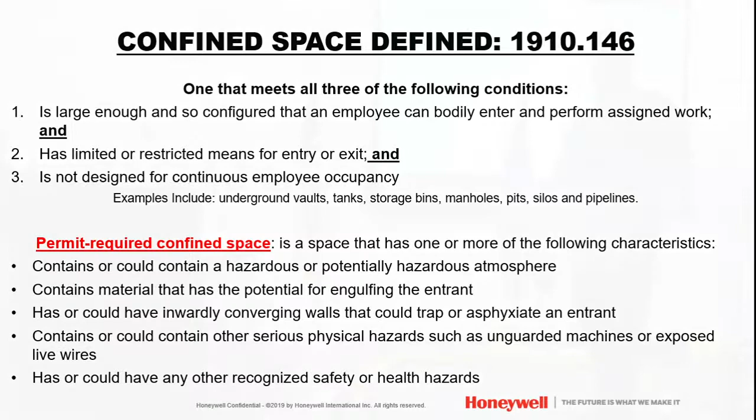Here's the last one that gets absolutely everybody, and you can't really defend this - has or could have any other recognized safety hazard. So what if it's dark? That's a safety hazard you can't see. What if there's mice or rats? Because you guys are underground - what if there's rats? That's a safety hazard to me because I don't want to be around rats.

So that's where you get on a permit required, and where people try to say stuff is a confined space and not a permit required confined space. That last sentence is where you struggle trying to defend yourself when you try to just say it's a confined space and not a permit required confined space.

So, confined space workers - now we're specifically talking about the workers. This is a great example for you guys out on your city streets, potentially, or at a pump station or something like that. You've got the entrant, you've got an attendant, you've got an entry supervisor, and an emergency rescuer.

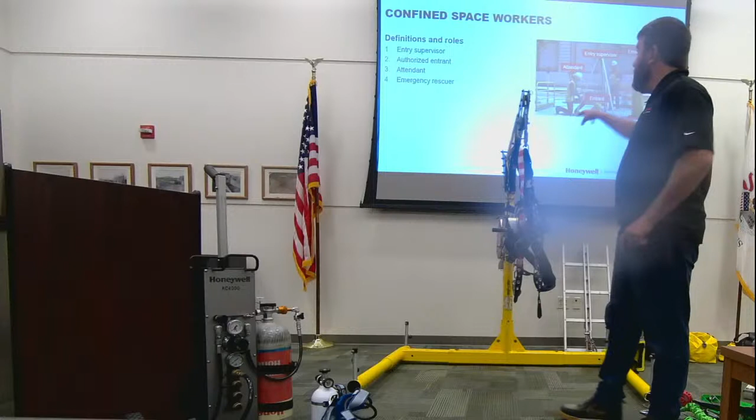You see how there's 3 people for one person going in? How many people want to admit here that normally a lot of times they only have one person for one person going in? So they only have a 1-to-1 ratio instead of a 3-to-1. I'm not going to call you out or embarrass you, but I know it happens because of course we're all busy - people don't show up for work, you've only got 2 people available. Yeah, I understand it happens. But if you want to do it right, you got to have those 3 people.

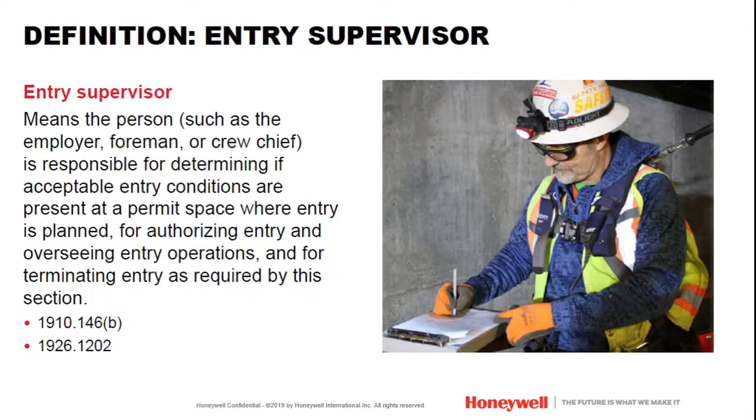So what's the entry supervisor do? Means a person, such as an employer, crewman, foreman, or crew chief, responsible for determining if acceptable entry conditions are present at a permit space where entry is planned. So essentially they oversee everything - that's what the entry supervisor does.

Authorized entrant essentially means a person, like the picture shows, climbing in. They're the person that's going to go in and do the work.

Then you've got an attendant. It's the individual - like Rich was talking about - making sure they don't have their phone, they're not distracted, that they're communicating with the person in the confined space, giving those direct readouts. You can see what he's doing there with his gas monitor.

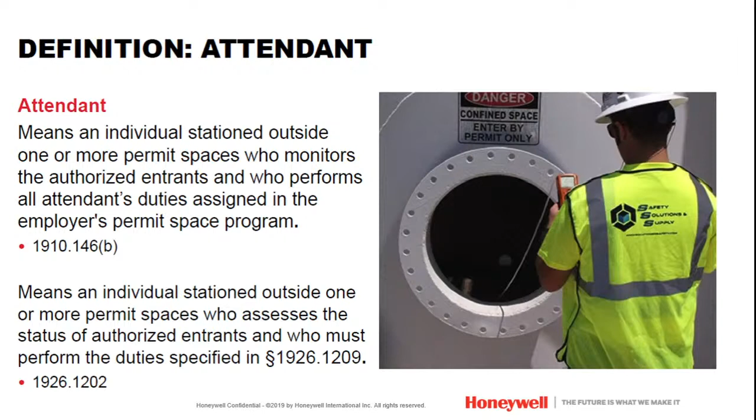And of course there's the emergency rescuer. That person is the one that goes in if the entrant becomes asphyxiated, has a problem, breaks a leg, or has a heart attack, that's the person going in to rescue that individual. So, 3 basic atmospheric gas hazards.

Of course, oxygen - are you deficient or are you enriched? Because both can cause issues. Being deficient would be lower than 19.5%. If I showed a gas monitor right now in this room, I know it has 20.9% oxygen because we're all standing and upright. If it goes below 19.5%, all of us would struggle - we'd have problems breathing. We'd all be affected a little differently, but that 1.4% is all we're talking about before our body starts having issues.

Of course, enriched oxygen can cause issues too, from flammability standpoints, explosions, etc. Human senses cannot detect oxygen deficiency or enrichment. So we don't know - I'm breathing this here, it might feel like it doesn't have enough oxygen, but we don't know that. Your body will eventually start trying to get more air because it's not getting enough, that's when you know, but you can't actually sense it directly.

Of course you've got your flammable gases and vapors. H2S can explode. There's an explosive limit for a lot of different contaminants, and all of them are at different levels. And then, of course, there's toxic contaminants. So essentially, hazardous atmospheres are any atmosphere that can become oxygen deficient or oxygen enriched. That's essentially what we're looking at there.

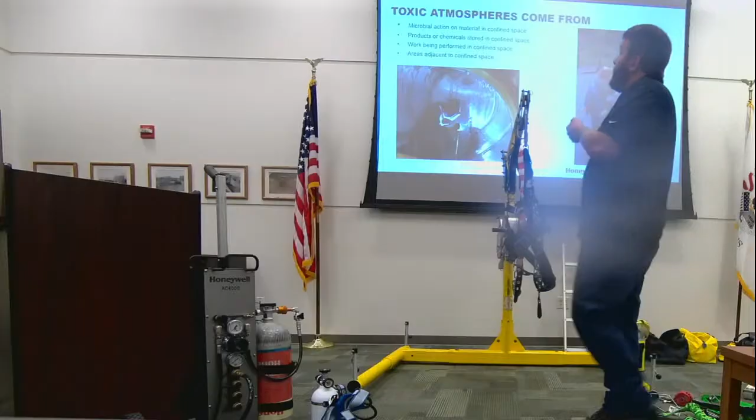Toxic atmospheres can come from the environment - maybe it's microbial, things breaking down and bacteria releasing those gases. That's an application you guys could potentially have - products or chemicals stored in a confined space.

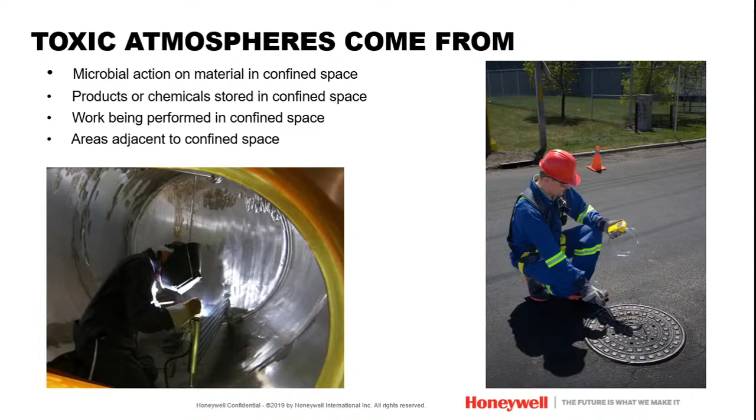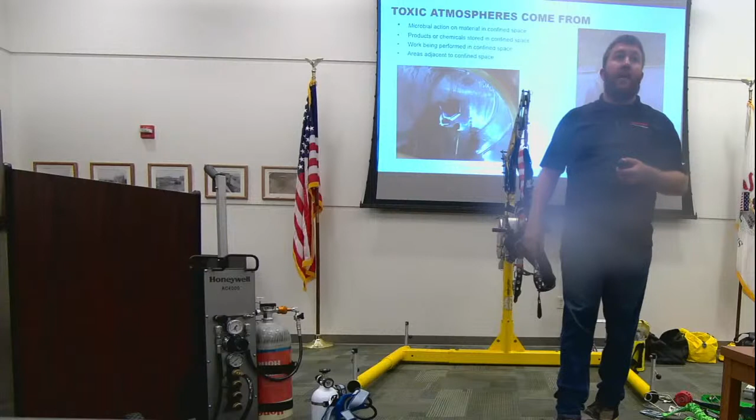So you can see this guy welding in the pipe. I assume you guys, especially here in Peoria, are talking about a 60-inch pipe - you probably have a lot of pipes like that. There's a specific example, I think it was out in Utah. Guys were in this pipe, there were like 6 of them. It was much bigger than what's there.

I mean, it was like 1,500 feet. They were cleaning their paint guns, spraying something, and they had a ton of MEK - methyl ethyl ketone, very, very flammable. They had a fire because they had all this stuff stored in there. I don't remember the exact details, but that's what I'm talking about - they brought the hazard into that confined space and had it all sitting right there.

They literally had to go another 1,000 feet down the pipe trying to get away from the smoke. It was so black the firefighters couldn't even get to them. So that's the kind of thing you have to think about when you're working in pipes and underground, etc. Make sure you understand what potential hazards there are.

Work being performed in the confined space, of course the welding creates potential gases, and then there's areas adjacent to that confined space. We had Tom, our gas detection specialist, give an example of a construction crew in a pipe like this underground - their monitors kept going off and they couldn't figure out why.

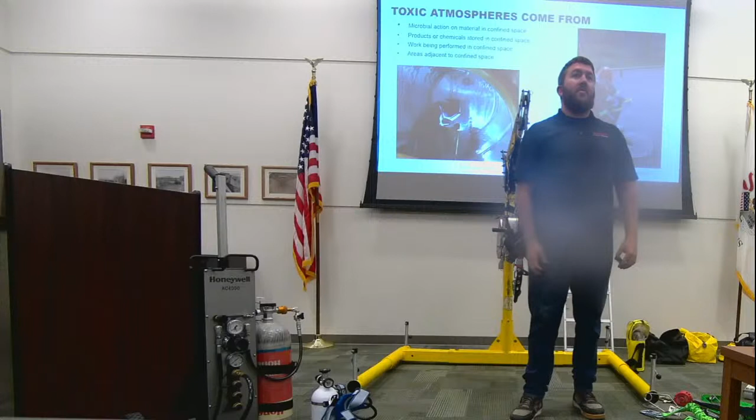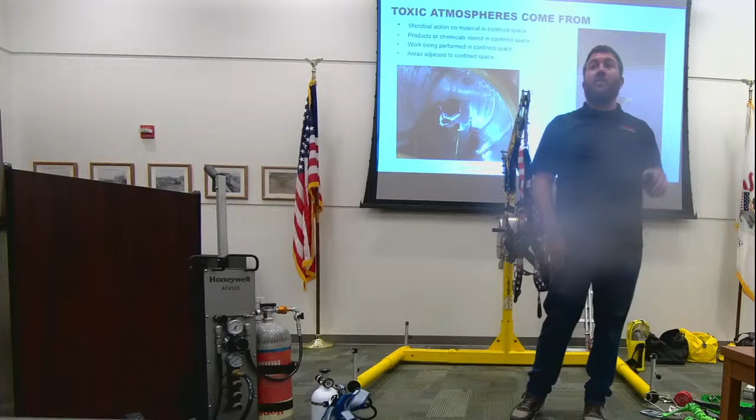But a half a mile down the road there was a big construction project, and it was all the exhaust from all their equipment right by their intake. They were literally getting all that gas because it was running all day long, and that's what was setting off their monitor. They thought something was wrong with the monitors, but he said no, the monitors work - the monitor's telling you that you need to get out of there. So it's not necessarily your own work; it could be somebody next to you creating that gas that comes into your area.

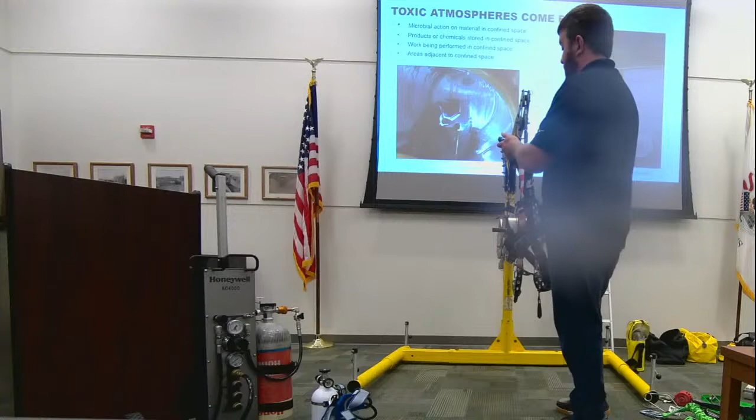So what is defined as entry? Essentially any action resulting in any part of the body breaking that plane. That guy right there got balls of steel because he's going down a manhole with nothing - that's like New York City or wherever it is. If you break the plane of that confined space, that's technically considered entry.

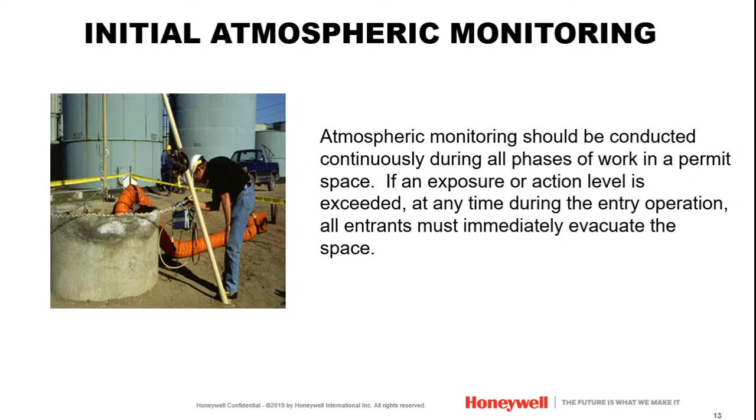So initial monitoring - you can see what he's doing there. Atmospheric monitoring should be conducted continuously during all phases of that permit required space. You've got to do it all the time. If any exposure or action level is exceeded at any time during the entry, everybody must evacuate. Jason was talking about a situation where the monitor went off and everybody got out - great, that's exactly what you're supposed to do. Again, your personal monitors are ring and run devices. It rings, you run. You don't sit and question and try to figure out what's going on - you get the heck out.

So when we talk about atmospheric testing, the main thing is with gas monitors. I get the calls all day, every day - my monitor's not working. Well, when's the last time you calibrated it? You've got your gas monitor, it's like a computer - it works right out of the box, but eventually the sensors become desensitized depending on how you're using it and what you're using it for. O2 is always the first one to go out, but it needs to be calibrated to make sure every time you're using it that it works.

It also needs periodic testing - that's what bump testing is. If you have a docking station where you put your monitor in and close it, I'll show you one if you don't know what that is. There are manual processes to calibrate gas monitors, but I quite regularly get calls and emails from people who just don't know how. If you don't know, that's fine - we'll come and help you understand how to use your monitors and your cal gas. But you've got to be able to calibrate specific to Honeywell - if you have Honeywell BW Technologies monitors or RAE Systems, typically on every gas monitor it's going to be 180 days to calibrate, and you're bumping every day.

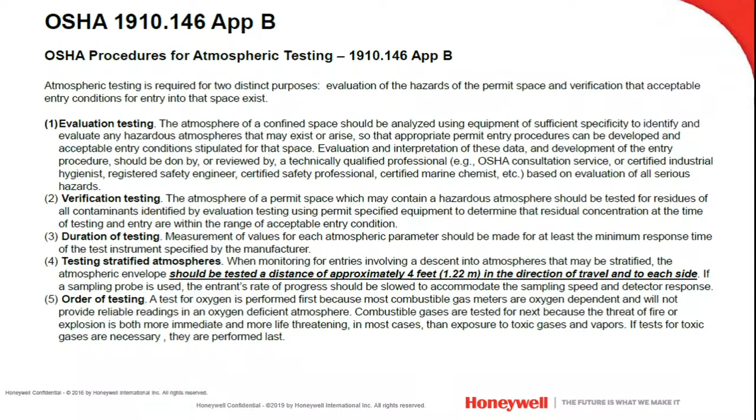Here's the specifics on how to do it, if you really want them - I'm not going to go through all this from a time perspective, but this is literally what you need to do for your atmospheric testing, your evaluation, your verification, your duration of testing. You see a lot of people put the hose down, go 30 feet down really fast and pull it back up. The problem is the more hose you have on that direct read monitor, the longer it takes that gas to get back to the monitor. So if you're going too fast, the monitor can't even respond because you're moving it too fast. There are very, very specific instructions on how to do your periodic testing and your pre-entry testing.

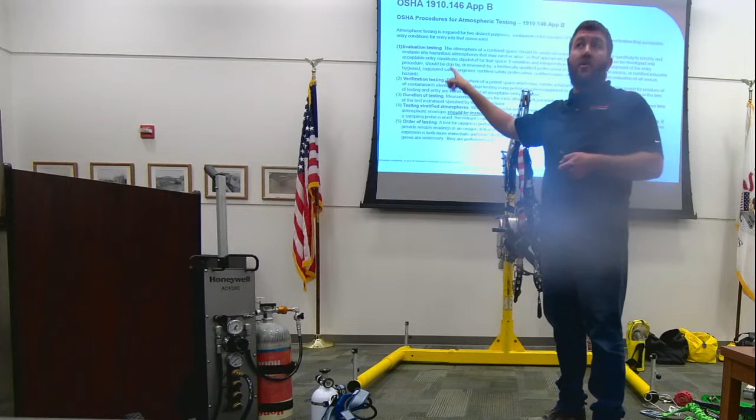On how gases are stratified - I have a thing here in a second that'll show you how atmospheres can be stratified, and that's why we do it. Depending on how many feet you have and how wide the confined space is, there are very specific instructions on how you do that monitoring. And there's a very specific test for order of testing as well.

So of course, minimum for safety entry is 19.5%. At 16%, you're going to start having impairment in judgment and breathing. At 14%, your body's trying to get air in. And then at 6%, it's really going to be difficult to breathe, and you're probably going to be dead in minutes.

Now the problem is with things like hydrogen sulfide, I don't know if you guys would ever have this application. I know it's in hog barns, but do you ever get your poop, and I'm assuming you guys are doing waste as well, correct? At most of your facilities? Does it ever get crusty and hard on top?

Of course, there's a bunch of different types and styles of monitors. There's even newer monitors that we've come out with than what's on the screen. There's Bluetooth connected monitors, etc. What you need to know is there's pumped versions, which is what you see at the top, where you can put the hose in, and that's where you're doing your pre-entry inspection. And then there's also diffusion monitors, which are at the bottom. Those are the personal monitors. So you can get a monitor to essentially do both, but there's also ones that just do the diffusion style, so you got it on your clip.

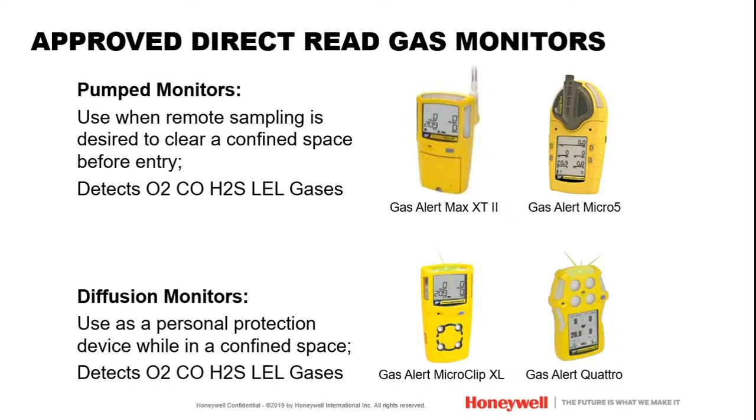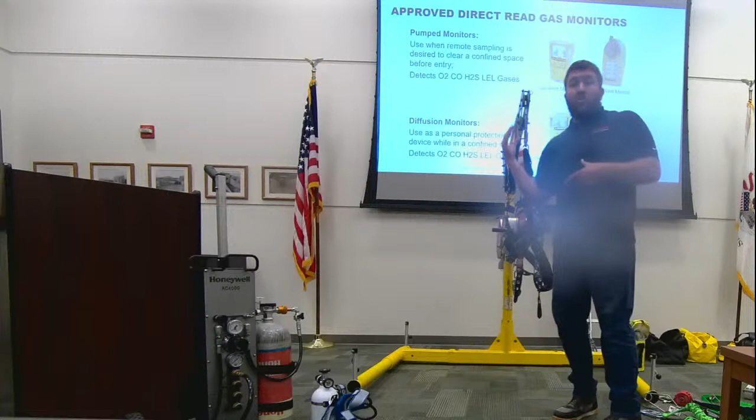There's also 4 and 5 gas monitors. There's single gas monitors. So if any of your facilities have chlorine, and you have only one area that has chlorine, and that's the only gas you're looking for, then we have a single gas monitor that's just for chlorine. We also have fixed gas. Of course, what we're talking about today is portable gas, but we also have fixed gas, which is a different type of monitoring. I mean, it's the same thing, it's just, of course, fixed. But there's different types of monitors.

So you got single gas, 4 gas, there's pumped units, you can get disposable units, you can get rechargeable units. Essentially the deal is you got to bump and you got to calibrate. That's the main thing on all these monitors. They don't work unless you bump and calibrate. One thing I see a lot of people doing is taking their monitor, whether it's wintertime or summertime, and putting it up to the exhaust for their bump and calibration. It's a terrible idea because you're going to poison those sensors. So do not take your monitor to the edge of your exhaust, that's going to poison those sensors in there. So not a good idea.

So pre-testing confined space, again, you can kind of see the graph there just showing to use the appropriate direct read gas monitor to ensure that the devices are operational, bump tested, and calibrated, which we've already talked about. So here at the bottom is what I'm talking about specifically. It says allow sufficient time for all sensors to react to each sample per level tested.

Key response factors are hose length, typically 2 seconds per foot of flow rate, plus T90 sensors, their response time. For example, 10 foot of hose times 2 seconds equals 20 seconds, plus most significant T90 of monitoring sensors, so typically 30 seconds for a standard 4-gas monitor. So if you go down with 10 feet of hose, it's going to take you 30 seconds to get that reading up at your monitor.

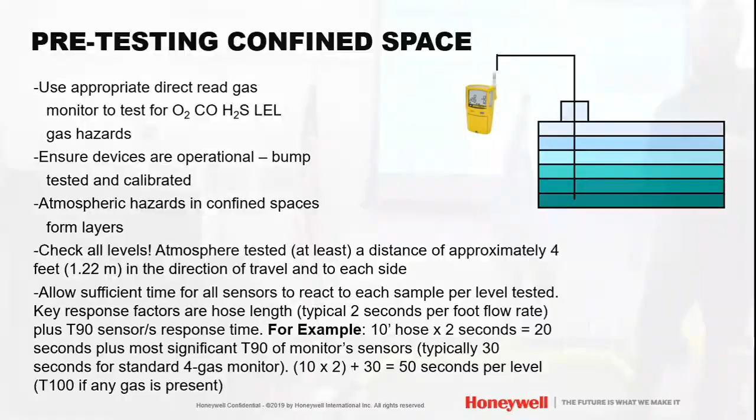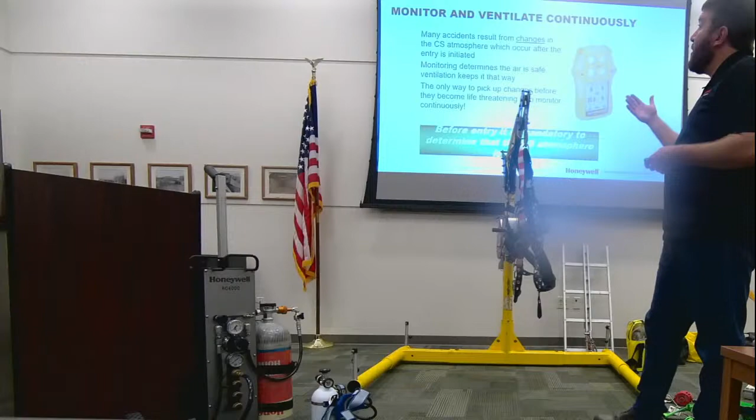Or potentially up to 50 seconds. So, of course, monitor and ventilate continuously. Many of the accidents result from changes. So you may do your pre-entry inspection, you may go down, you got your thing, but all of a sudden something happens and now your monitor goes off, and you're already down there. You're like, what the heck, I already did it. But atmospheres can change, gases can change. There's a lot of factors that can potentially cause those changes.

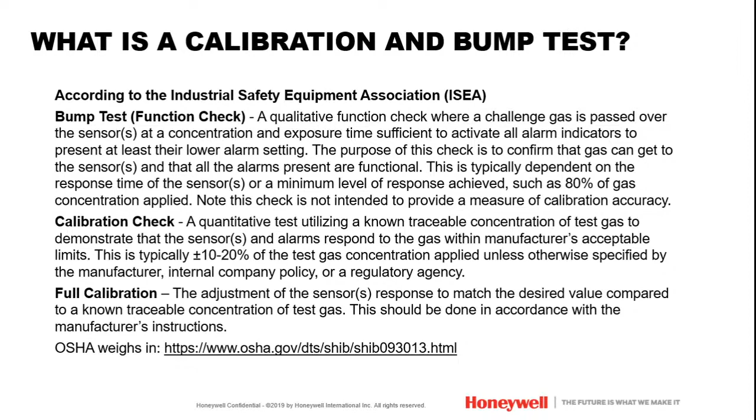So, what is a calibration and bump? Essentially, a bump test is just that function test to make sure it works. The calibration is a quantitative check that actually says yes, all these sensors are doing exactly what they're supposed to be doing. And there is also a full calibration as well.

So that's the difference between a bump, a calibration, and a full calibration. Make sure you follow the manufacturer's instructions. Zero the instrument in fresh air prior to use. So you don't want to just turn on your monitor and bring it while you're in the space. You want it in fresh air to make sure it's actually reading correctly. There can be a loss of sensitivity in the sensors that requires replacement.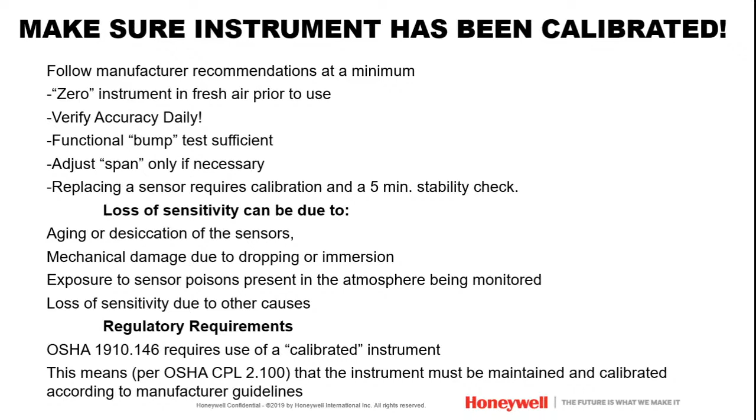A lot of our monitors, you can replace the sensors yourself. There's aging sensors, could be mechanical damage, could be that you had an exposure to something you weren't technically prepared for, etc. That could do it as well. So there's a lot of issues. I'm kind of harping on it here, but make sure you're bumping and calibrating, because like I say, I go to a lot of places and people don't bump and calibrate. It can't work if you don't maintain your equipment.

That said, bump and calibration is specific to Honeywell. So if you have different monitors, MSA, Industrial Scientific, etc., check your user instruction manuals for what they say.

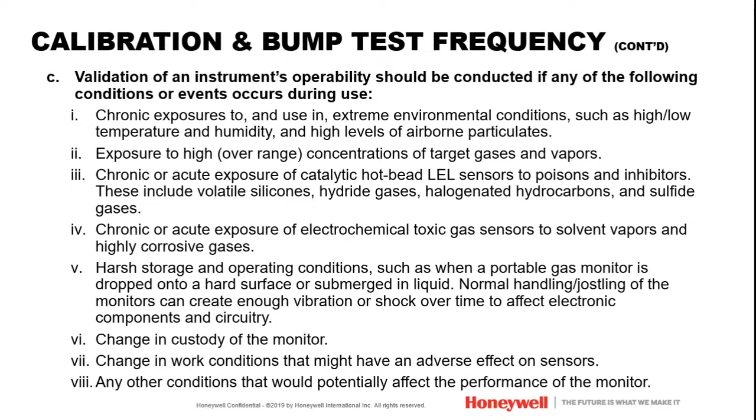You can also have the device connected.

Sorry, am I standing too close? Sorry, stand back.

You can also just connect the device. There's also Bluetooth capable instruments, etc., that can pair for a lot of lone workers and different things. There's a lot of new technology, so if you haven't seen the technology, you can reach out to us. We can get our gas detection specialist in touch with you, and we can go from there.

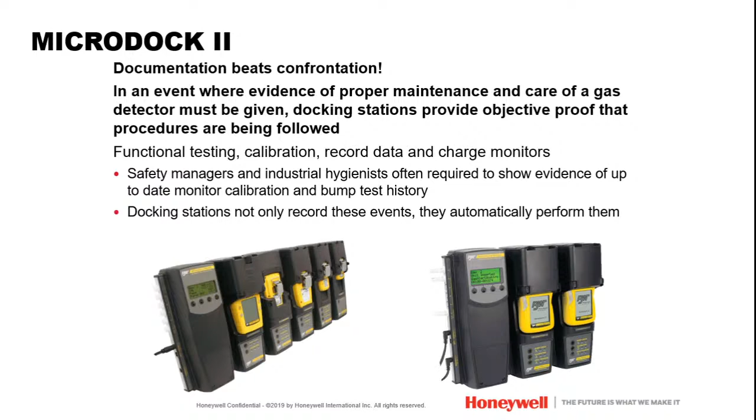So other items that need to be checked, performed, and completed before entering that permit required confined space. The big thing is isolation of the space. Now, we don't do lockout tagout. I don't claim to be a lockout tagout expert, but I can tell you there are very many instances in confined space.

The biggest one is bumblebee tuna. If you ever want to look it up, look at the bumblebee story. It's a terrible story. The guy was in a tank working, somebody didn't look to make sure, and the tank and the system was not locked out, and they dumped a bunch of tuna in and flipped on the equipment.

So that's what I'm talking about.

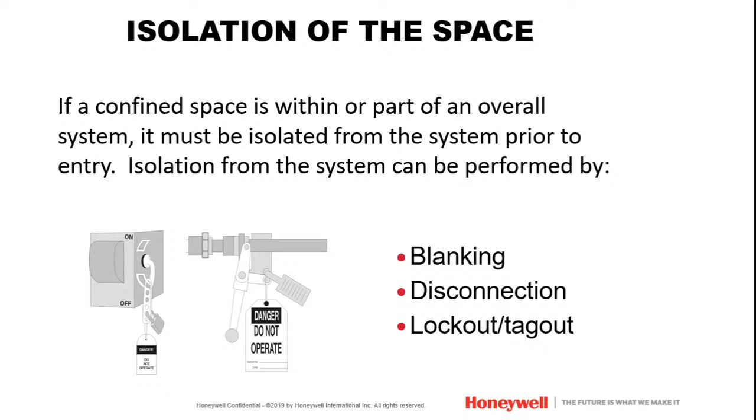So say if you guys are out working and you've got the electricity shut off to this space because there's water down there and you're down there working, it needs to be locked out. That space also needs to be valved. We were talking to Jason. Maybe you're in that tank doing the same thing the bumblebee tuna guy is, but somebody flips on a valve, opens it up, and dumps in a bunch of chemical while you're in there working. That's what we're talking about when you're isolating a space, making sure you have your lockout tagout.

So of course the person that goes into that space has a key. If you're not familiar with lockout tagout, you got a bunch of keys. That person who would go into that space would have a key, so it can't be unlocked because his lock is on it and you can't open it without his key. That's your check to make sure somebody doesn't accidentally kill you by opening up a valve, driving a truck over it, whatever the case could be. So making sure you isolate and disconnect anything that could make it hazardous while you're in that permit required confined space.

The other thing is ventilation, making sure you got fresh air. There was a picture showing two guys working with the blower up top. We don't make blowers, but I can refer you to a manufacturer. Allegro makes one, Pelsue makes a blower, or somebody else. Essentially you're circulating fresh air, so if you have that confined space, this is your engineering control to make sure that space has consistent fresh air. So for ventilation practices, locate the blower where you're not pulling nasty air into your space. That ensures vapors and gases are exhausted from the space and vented to a safe location.

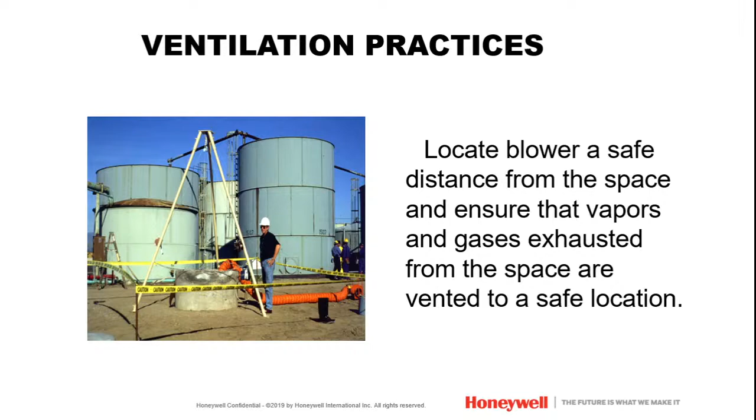Non-entry rescue - this is what a non-entry rescue would look like. If this is my confined space, my rescuer is standing right here because he's hooked up to the rescue retrieval device. So a non-entry rescue, and then a last resort would actually be an entry rescue. Say, for whatever reason, the person who went down, when you pop the pin to start cranking them out, say they get hooked on something and you can't get them out - now somebody's got to go down and do it. So those are your three rescue options: self-rescue, non-entry rescue, or as a last resort entry rescue, and that's the hierarchy you should follow.

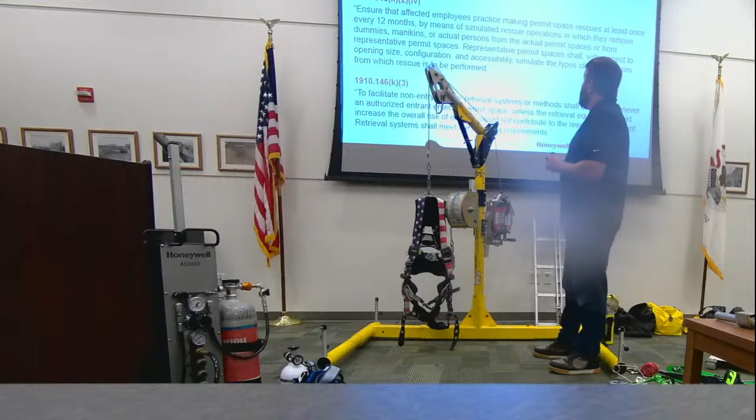So the key rescue regulations: ensure that affected employees practice making permit required confined space rescues at least once every 12 months. So if you have a permit required confined space and you're not doing rescue training right now, that's an OSHA violation because you've got to be doing it, in which they remove dummies, mannequins, or an actual person from the actual permit required confined space.

To facilitate non-entry rescue, retrieval systems or other methods must be used whenever an authorized entrant enters a confined space, unless the retrieval equipment would increase the overall risk. So if you're not doing confined space rescue training right now, we need to add that to your document.

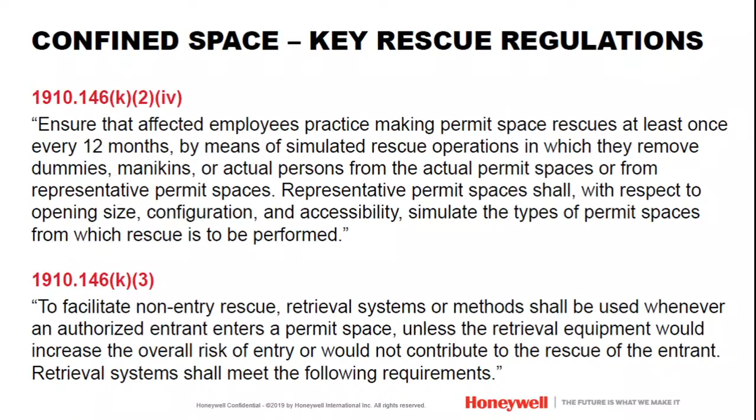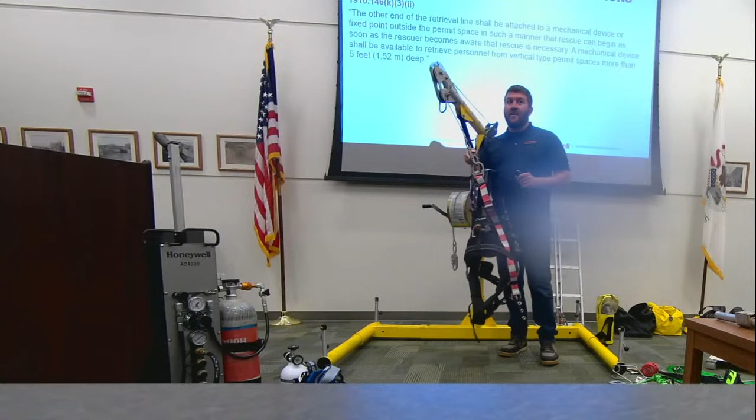Okay, so the main thing I see - I was at another sanitation department in Illinois, and they were sending 8 people, or 7 to 8 people, down into a confined space. If you're going to have 7 to 8 people in a permit required confined space, you've got to have 7 to 8 of these, because you do not disconnect this.

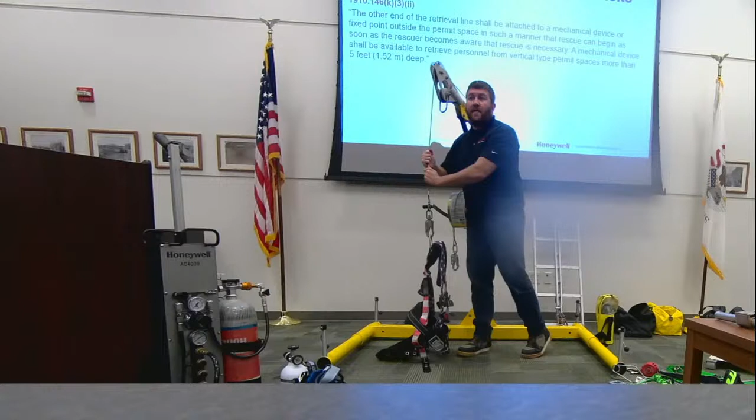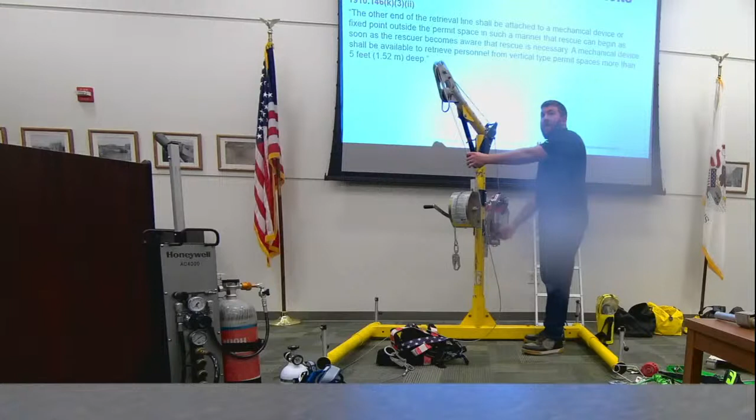So this device right now - make sure, so right now this works. I can just wear this, and if I pull, it's a self-retracting lifeline, so it stops. If I fall, this stops me. Now, if the person's going down and down and down, and now all of a sudden, say the gases overcome them and they get knocked out, what you do is there's a pin right here. You pop this pin, that handle pops out, and now I crank them in. You can see it's going to - that's how that works.

So my point is, that company literally had one of these stations set up and had everybody going down like this. So what happens? Who's the first? Are you going to fight to see who gets to go up first if your monitors go off?

So that's my point. If you have 7 people in a confined space, that's probably an extreme hazard. And they were talking about some device where they said, we have this drill that can speed up somebody faster. I'm like, I don't know about this one, guys.

If you really have work that requires 8 people to be in a confined space, you need to reconsider that work. It's very important to have those considerations, because what happens if all 7 of those guys get overcome with gas? You got to have at least 7 more people up top to go rescue each person. Plus you're in a manhole. There's all sorts of problems with that scenario.

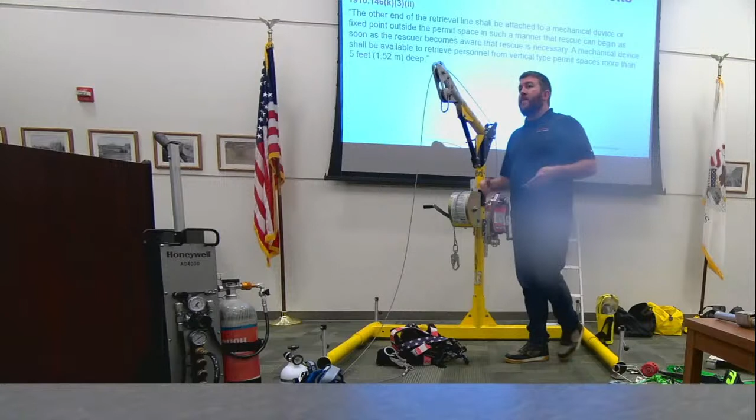So just make sure this cable from your rescue retrieval system never comes off your back D-ring. Now, if I need to be raised or lowered, we don't raise and lower with this device, we raise and lower with this device. So you're going to have two cables hooked to you.

So if you have a manhole that doesn't have a ladder in it, and you need to lower somebody down, or lower a piece of equipment down, you got to have a manhandler. This thing can do up to 475 pounds. On your harness, there's multiple ways you could have it, but on this particular harness, the cable goes to the back, and the manhandler goes to my front D-ring.

So now as I'm being lowered down into that hole, I've got my rescue retrieval system on my back D-ring, and the manhandler goes in the front, and I'm kind of just being lowered down like this. Does that make sense to everybody?

So now once I get down to the bottom, I could disconnect that and get rid of it, but I keep this attached, because if I have problems and I radio somebody, hey, my monitor's going off, boom, they can just pull me up.

And of course you want your back D-ring, because what happens if I become unconscious? I want it on my back D-ring, not my front D-ring. If I put it on my front D-ring, I'm going to come out like this if unconscious. If I have it on my back D-ring, I'm going to come out like this. When you're trying to get somebody through a manhole, you want them like this, not like this. So keep that in mind.

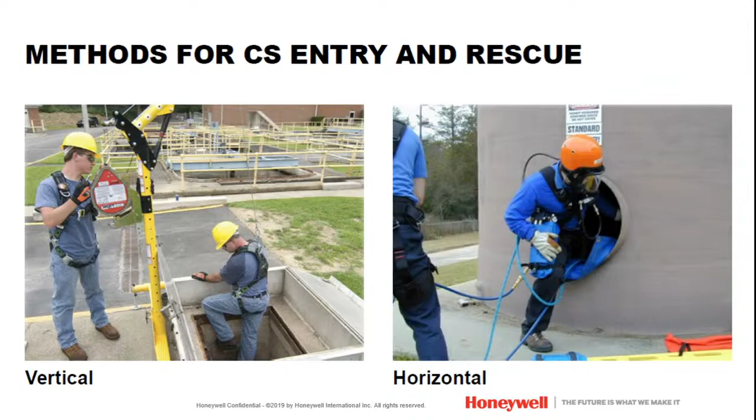So you can see the different pictures there of an entry going down. You've got your rescuer right there, and of course this is a horizontal setup. This particular device, in my opinion, is better than a lot of your tripods, because it can be used for both horizontal and vertical applications.

So here I'm just going to go briefly over this, since most of you guys might have tripods. There's nothing wrong with tripods, you can continue to use them. You use these same two pieces of equipment on a tripod. This just has a lot more versatility.

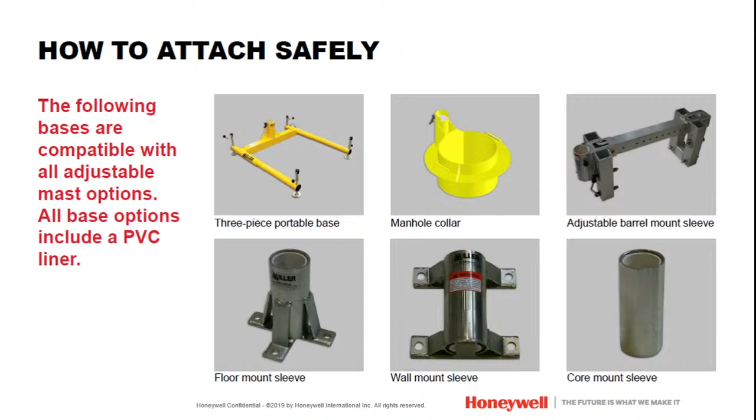It's got the post here, which can come in different lengths. It's got a lot of different bases with it. You can see here some of the bases. I've got that 3-piece portable base on this unit. There's one for a manhole collar, there's an adjustable barrel mount, and these are all fixed, flush mount, wall mount, floor mount.

So the idea with this system is you can buy one of these posts and a bunch of different bases for all your different confined spaces. That way you only have to take this, you don't have to take a base everywhere. You just put bases everywhere, and you have this one post.

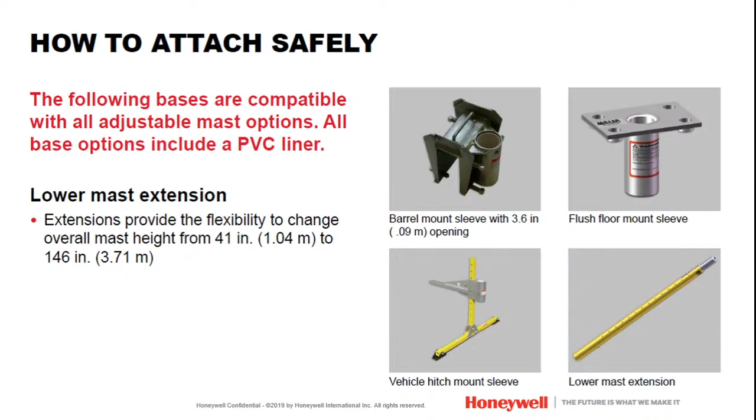So you even have a version that you put on a vehicle hitch. If you've got to come up to a manhole cover, you just put it right on the back of your vehicle hitch. What I'll say on a vehicle hitch though, you got to think about lockout tagout, because what happens if somebody drives off that truck where you're hooked to it? That's the problem, so you've got to put a lockout tagout if you're going to use the vehicle hitch.

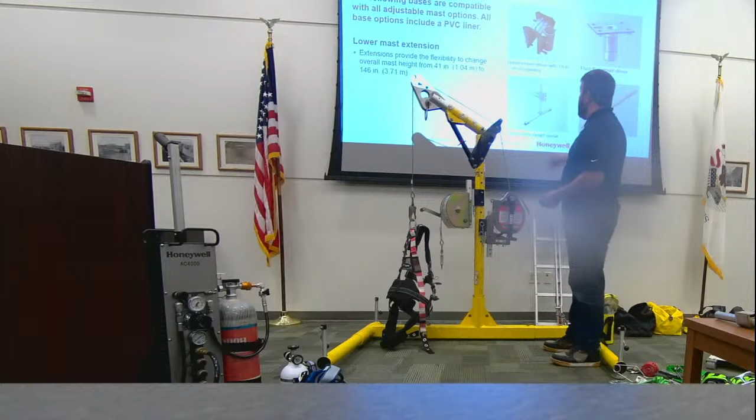Of course, there's flush mount and then a different type of barrel mounted sleeve.

This is an extremely versatile piece of equipment for applications with a bunch of different versions. Or if you've got a tripod that's angled, the problem is it's great for up and down applications, but if you have to go left or right, the tripod doesn't do so hot. This device doesn't require flat surfaces, and these don't even have to be the same width and length. It's got levels on it, so you can adjust it even if you have a floor that's not level.

We talked about the manhandler. Of course, this is your SRL rescue retrieval device. Again, you only pop this pin when there's a rescue. So you pop this pin, you'll kind of hear it. Now it's in rescue retrieval mode. To put it back into SRL mode, you just push the handle back in. But you only pop that pin when there's a rescue retrieval, because the problem is I've been to places where they say, hey, my rescue retrieval device doesn't work.

The first question I ask is, how do you get into your confined spaces? Do you have ladders? No, we raise and lower. Okay, can I see your setup? Nobody will have ladders, everybody will have these, and this is how they're raising and lowering. This is not designed to raise and lower. You want this thing, when you pop that pin, you want those gears in there to work. It's not designed to raise and lower. You've got to have one of these.

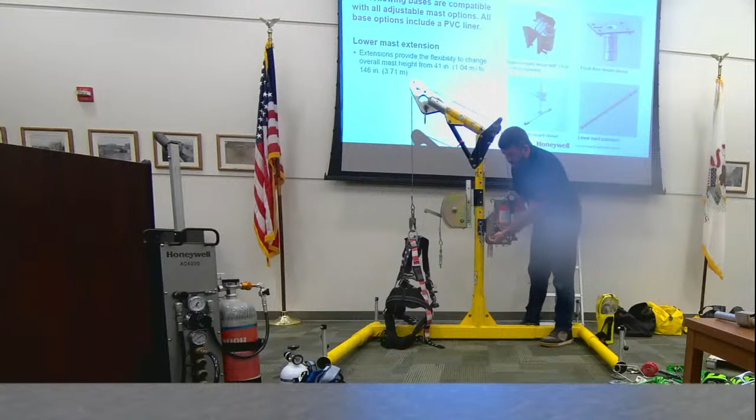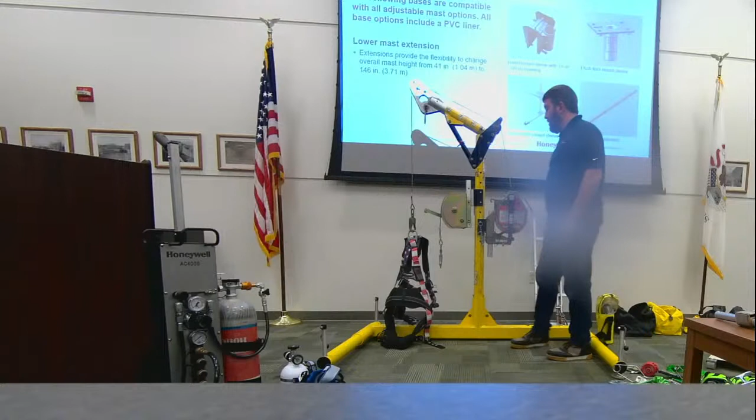These can be repaired. Of course, you can send these back to Miller and we can repair these. So if you do have a fall, or if it's not working, both this and this can be repaired, just as an FYI.

So additional confined space essentials, you can get a rescue ladder. So maybe you have something that doesn't have a ladder in it, you can throw down a ladder, or if somebody fell over the side of the building, you can throw down a ladder. Of course, you've got different types of carabiners, different anchor straps, or different rope. There's lots of different ways to rescue somebody, and a lot of different types and styles of rescue equipment.

We do have specific confined space rescue classes. It's a 2-day class, I believe, where you can go through confined space rescue. I believe we can do it on site if you guys wanted to set it up, but we also do classes in Pennsylvania and Texas, because we actually have a gym with a bunch of faux confined spaces where you get to do all this stuff.

There's different rescue systems. You can see the QuickPick rescue system. We've got a Miller Series 70, and you can see it's kind of got like a Bosun chair. The QuickPick rescue system is essentially just a pulley system. You've got 2 pulleys. You put, of course, a cross arm strap with 1 pulley, and the other pulley goes to the person.

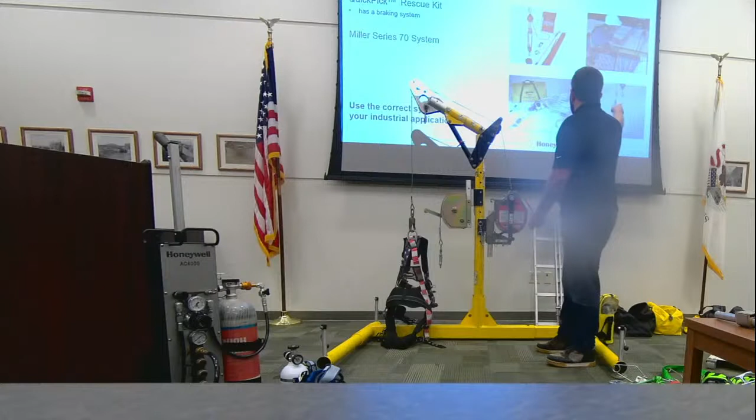So that's that QuickPick rescue system. Miller Series 70 works just a little bit different way. We also have a SafEscape system. It's more specific, I don't know if you guys would have an application for it, so I won't go over it. It just depends if your facility had something that would fit the application.

So does anybody have any questions on gas detection or fall protection specific to confined space?

Because for the last half hour here, we're going to go over respiratory equipment, how to make respiratory selection. My first job at Honeywell, I was a respiratory specialist. I'd say respiratory is our most technical product line. Fall protection seems very technical, but I quite regularly see people misapply respiratory protection. And respiratory protection is not like fall protection - if you're working at 4 feet, you've got to have fall protection on. Well, just because you're in a confined space doesn't mean necessarily you have a respiratory issue. Now there could be - you may be welding, painting, grinding, and have hazards in the atmosphere that require you to wear respiratory protection, or maybe there's a potential for hazards. So that's why we're going to go literally through respiratory selection and how to make it through this presentation, because it's very, very technical in nature.

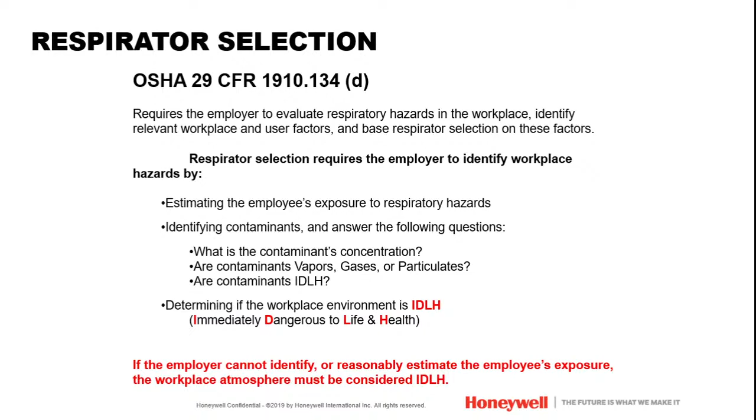And then are those contaminants IDLH? IDLH means immediately dangerous to life and health. So if you have a common contaminant, you can literally go into Google, and if you had ammonia or chlorine, since you guys were wastewater, you got chlorine, you can type in chlorine NIOSH pocket guide, and it will literally tell you all this information. It'll tell you a lot of information that you don't need. Actually, I think I might have an example of it in this presentation. But it'll tell you all the information that you need to know if you have chlorine.

I'll show you one. So determining if the workplace is IDLH. If you as an employer, say you had a manhole, Jason was like, hey Zach, we need to go in and do this work. If Jason cannot determine whether or not the atmosphere is safe, because maybe he doesn't have a gas monitor on him for whatever reason, if he can't determine if that's IDLH, you have to assume it's IDLH. So that's the problem. If Jason couldn't reasonably estimate the employee's exposure, you've got to assume it. So that's why it's very, very important to know what potential you're exposing yourself or other employees to.

So you got to consider if that's going to be IDLH, and every contaminant has a different IDLH. So of course you've got dust, mist, and fumes. This is specific to particulates. There's a difference between dust, mist, and fumes. Fumes, a lot of people think it's a vapor or gas, but when you weld, that's actually a fume, which is considered a particulate because you're heating up the metal and that gets in the air. That smoke that you see, that's actually a fume, not a vapor or gas.

Of course, paint sprays or pesticides would be your mist, and dust is pretty self-explanatory. One of the big things when we're talking about chronic illnesses, which there's new standards around, is silica. Silica's in concrete. So say you're putting in a new whatever, and you got to drill 500 holes of concrete, you got to bore in holes. Of course, it's going to kick up dust like crazy. That's an issue. That's what we're talking about when making that respiratory selection.

So maybe you're going into a confined space to do that. That's what your respiratory hazard would be. It may not be IDLH, but it's potentially hazardous to that employee where your gas monitor is not going to pick that up.

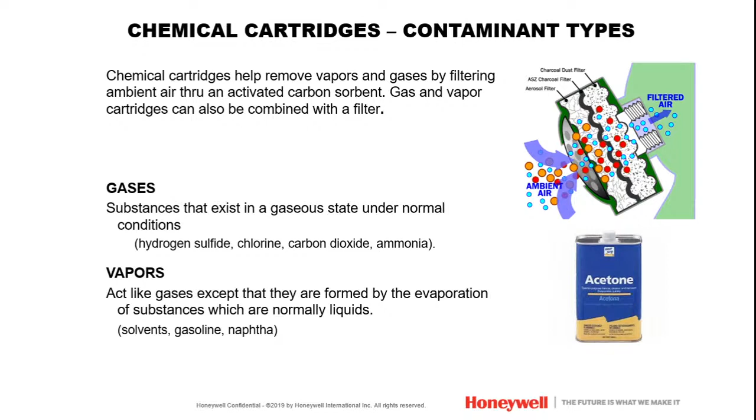So of course you've got chemical cartridges and how a chemical cartridge works essentially. You've got your vapors and gases. Your gases are like hydrogen sulfide, chlorine, carbon dioxide. We make specific cartridges that filter hydrogen sulfide, H2S, and then of course vapors would be your solvents, gas, and naphtha. That's how your filter works. It just essentially has different layers of carbon in there, and it literally just passes through the filter, absorbs into that carbon, and doesn't go into the face piece.

The problem with filters like that is they can become full, and you don't know when they're full. Smell or taste can't be the reason you change a filter. You have to change it out before that, because if you can smell or taste it, that means you're being exposed to the hazard, so you've got to change it out before that. So you do have to have a cartridge change-out schedule within your respiratory program. For instance, if you're doing chlorine, those filters don't last forever, so you have to have them on that change-out schedule.

So a lot of people, as a best practice, say we've done our industrial hygiene studies and decided that your filter will only last a month. So you literally just write your date on the filter, and if it's October now and your filter has a September date on it, you throw them away and get new ones. That's literally what people do for those cartridge change-out schedules.

When making respiratory selection, the big miss with a lot of people is there's only two things you can use for IDLH applications - those immediately dangerous to life and health. That's when you're below 19.5% oxygen.

You can use a system like this, which is a pressure demand system with the escape bottle. You have to have this escape bottle attached to it - of course you're breathing off that. If for whatever reason it runs out, your hose gets clipped, whatever, this is how you're getting out of that space. So you have to have this for an IDLH application.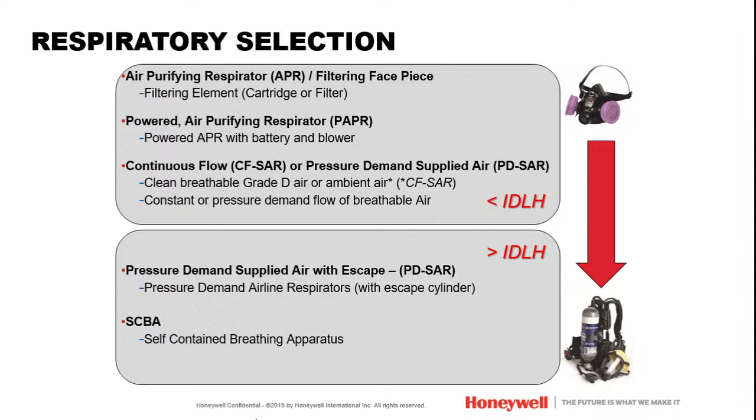So how do you do it? You've got to determine the maximum use concentration. What is the maximum use concentration? You take the contaminant - so if we're going to stay with chlorine, we're going to take its permissible exposure limit, and multiply it by the assigned protection factor of the respirator.

I'm going to give you an example here that'll make this more sense, so you can see the formula: the PEL multiplied by the assigned protection factor equals that maximum use concentration. The thing is, what it says down here in red - you can't apply that to IDLH applications. I'll give you three specific examples that'll make more sense.

So here's the respirators, this is specific to Honeywell. Here's what our different assigned protection factors are. You can see it obviously gets increasing with size. Your pressure demand with escape and SCBA is 1,000 and 10,000 times the permissible exposure limit, whereas if you have like an N95 mask or a half mask respirator, you're only getting 10 times the permissible exposure limit.

I'll give you an example of a permissible exposure limit in a second, but say your permissible exposure limit is 1, and you have a half mask respirator - you can only do up to 10 parts per million with that face piece. And if you're above 10, now you can't wear that face piece. Does that make sense to everybody?

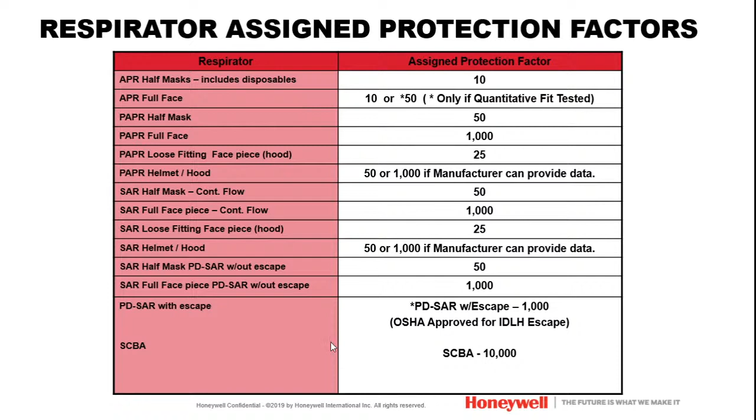So here's how you would potentially find your permissible exposure limit on your SDS sheet. If you open up your SDS sheet for that contaminant, if it's in that confined space, a lot of times it's in section 8. It gives you your exposure controls, and you can see it gives respiratory protection specific for that chemical on your SDS sheet. Now, unfortunately, sometimes on those SDS sheets it just says wear a respirator.

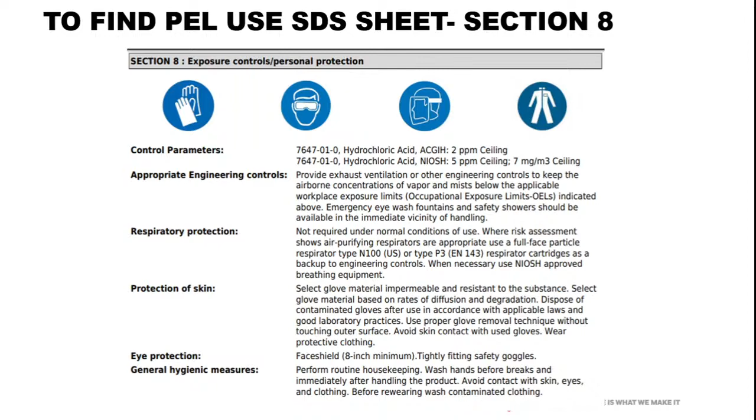You're probably like, no shit, wear a respirator - what kind of respirator do I need to wear? There's a bunch of them. So sometimes, like this is a great example, it tells you exactly what type of respirator you need to wear. My point is, I'm giving you resources to answer what seem like very hard questions that a lot of times are readily available if you just know where to look. So look at section 8 on any SDS.

And it also, of course, other than respiratory protection, may give you other PPE that's on there as well. But then, here's hydrogen chloride - here's off the pocket guide. So this is what I was talking about for the NIOSH pocket guide.

If you type in hydrogen chloride - every chemical has a CAS number - and you go to that link, at the very bottom this is what it gives you. It tells you exactly what you need to do based on the different concentrations - exactly specific what respirator you need to wear.

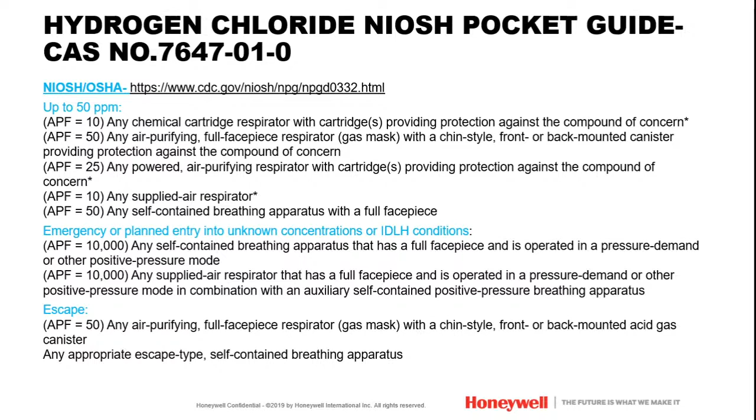So I know, like I say, respiratory selection can be very confusing, very hard to do, but there are a lot of resources to make your decisions very easy. So here's your example - I guess I'll only put one on here because it says example number 3.

So if you have this XYZ chemical, doesn't matter what it is, if you've got a PEL that equals 5 milligrams per meter cubed, and your IDLH is 2,000. So you're assuming I have an exposure level of 2,200 milligrams per meter cubed, above the IDLH. Can I use a continuous flow supply air respirator that has an APF of 1,000? What you do is take the APF of 1,000 and multiply it by the permissible exposure limit.

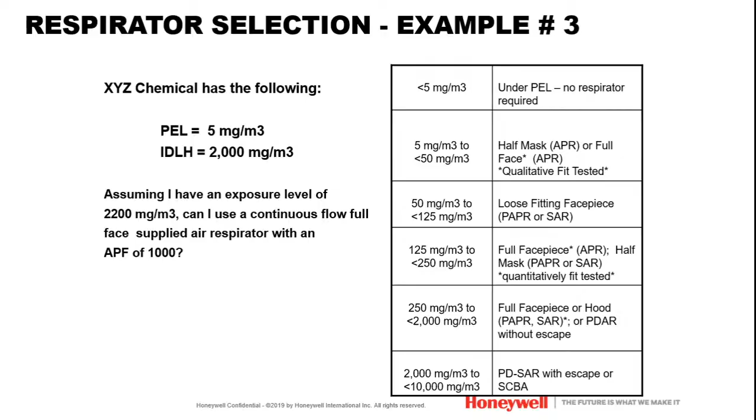The problem is you can't exceed that maximum use concentration. So there's only two things you could use for that application, the pressure demand system or the SCBA, because it's an IDLH application. It shows the IDLH was 2,000 and you're at 2,200, so you can't use a continuous flow respirator because it's not allowed by OSHA.

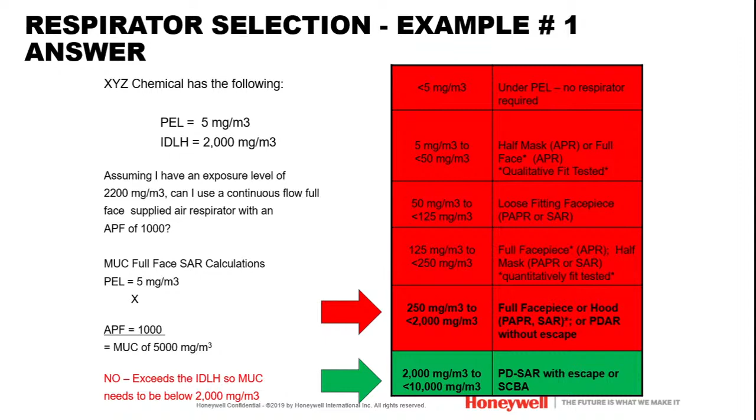A lot of times I like to recommend this for confined space entry, because think about it, a lot of your manhole covers, and if you had to go into a tank on the side, you're talking 24 inches. So a big guy like me trying to get my ass down, climbing that ladder with an SCBA on my back, it's a tight squeeze. Especially if I'm trying to rescue somebody, now I'm trying to move around with this big tank on my back. This is why this system...

Now the drawback is I'm tied to a hose, so yeah, I'm gonna have to drag this, pull this, it can get caught, etc. But it's much easier for me to climb down that manhole cover with just this little tiny tank and a hose than with a big old SCBA on. Now I gotta bend down and try to pick somebody up, and if you've ever worn an SCBA, it digs into your back and the back plate's stiff. This is the difference, you're tied to the hose, but you've got an air source.

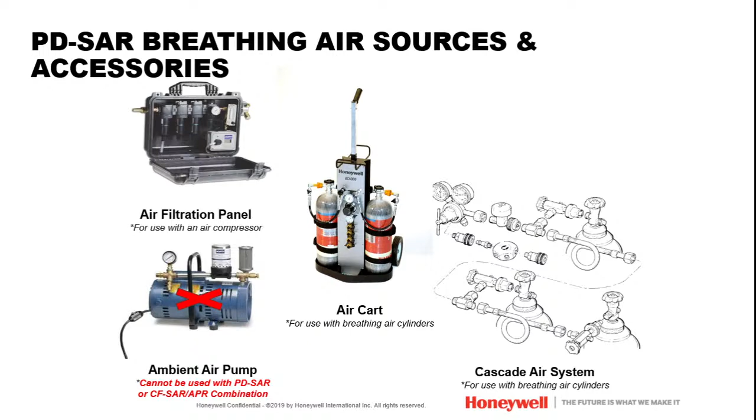You can use an ambient air pump on the bottom left, and on the right you see a cascade system. So if you get the big bottles from somewhere like Airgas that are full of air, you can hook a bunch of those together, like 4 or 5 of them, and have one air source where you're breathing off all those tanks, so you can work for like 8 hours or something like that. So that's your different accessories. All of these, except the one on the bottom left, could potentially be used in a confined space respiratory application, especially if you're worried about IDLH applications.

If you're worried about things like where would I fill the tanks, there are people in Peoria that can fill your tanks. If you buy a Honeywell SCBA, we have an authorized repair center in Washington, so it's really close, called SCBA's Inc. They service everybody around here, a lot of the fire departments and different things like that. So if you need something fixed quick, you have literally a 20-minute drive to your repair center. That's specific to Honeywell, obviously every other manufacturer has their own repair centers, but that's a Honeywell repair center over there, so you can do that as well.

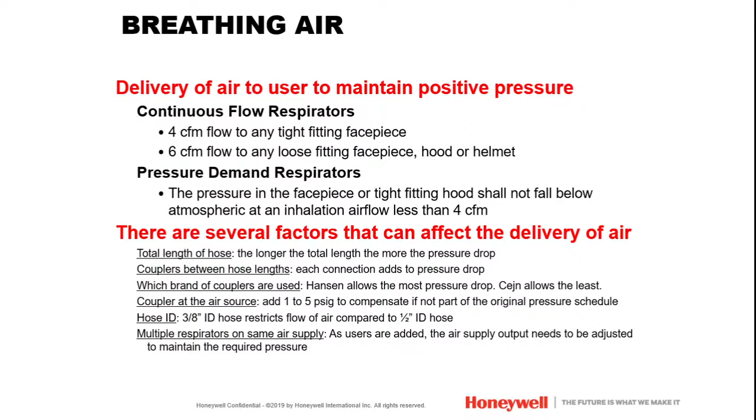So here's what I wanted to get to: escape solutions. Jason said they have these 5 or 10-minute escape bottles like this. How this system works, I don't think I have any pictures of it. Now, there are 2 different types of escape: what they call non-IDLH escape and IDLH escape. So we've got these things at the top, that's a mouth bit, you really put it in your mouth. It's essentially an APR cartridge, and you've got a thing that plugs your nose. It's only for acid gases and ammonia, methylamine, there's only 2 versions we make for that. Probably not something you guys would potentially use.

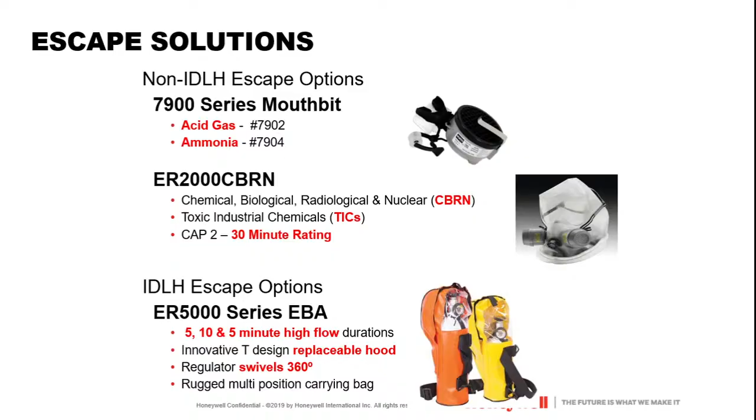We also have the hoods there, you could potentially use those. Say you have an office inside a plant where you've got people working, and say, what do you do if the chlorine alarm goes off or the H2S alarm? How do you get out of there? That's what that device is used for. It's only non-IDLH though, it can't be used for IDLH applications. So maybe they're not at the source, but they're going to have to walk by a potential area before it ventilates through, so that's what you can give them.

The last thing I'm talking about here is the version on the bottom. This is used for escape applications. So maybe this is our room where we have a potential IDLH application, I can essentially wear this.

$500. These things can be serviced and repaired by SCBA's Inc. here in town. If you decided you wanted that for a particular application, I have a training deck that goes over it. These are very easy to use and maintain. The monthly inspection is literally checking this gas gauge to make sure it has oxygen in it. It can be filled locally - I think Getz fills a lot of these, so they can come on site and fill them real quick. There's really not a lot of maintenance that goes with these. Over 5 years, yeah, there's going to be some maintenance, but really not a lot. This can be a lifesaver.

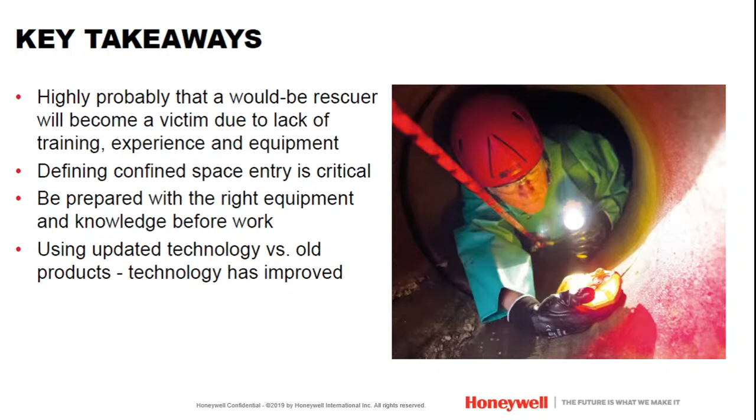So key takeaways: it's highly probable that a would-be rescuer could become a victim due to lack of training, experience, or equipment. That could be from a fall protection standpoint, a gas detection standpoint, a respiratory standpoint, or all of the above. Defining a confined space entry is critical. A lot of people want to take a permit-required confined space and just call it a confined space because they don't want to do all the training and other requirements for that.

If you have a big job coming up that you know will be a permit-required confined space and you don't have all the equipment, there are companies that do standby rescue. They're literally off-duty firefighters—there's probably some here in Peoria—and they don't use your equipment, they bring their own. You tell them exactly what you'll be doing, and they sit there the whole time as your attendant and supervisor, making sure if you have a problem, they're the ones who come get you. So if you only do a project once a year, you can hire a standby rescue team that handles everything from a rescue standpoint. Just an FYI.

Be prepared with the right equipment and knowledge before work, and use updated technology instead of old products. You talked about harnesses and other outdated equipment. Even with SCBAs, you wouldn't think about it, but this second-stage regulator has been updated in the last 10 years to make it much more functional and easy to use. The old ones were big and bulky—you needed three hands to operate everything. These are much nicer and easier to use. This is the regulator that pops into the face piece like that—you see how easy that was. The old versions were much harder to use.